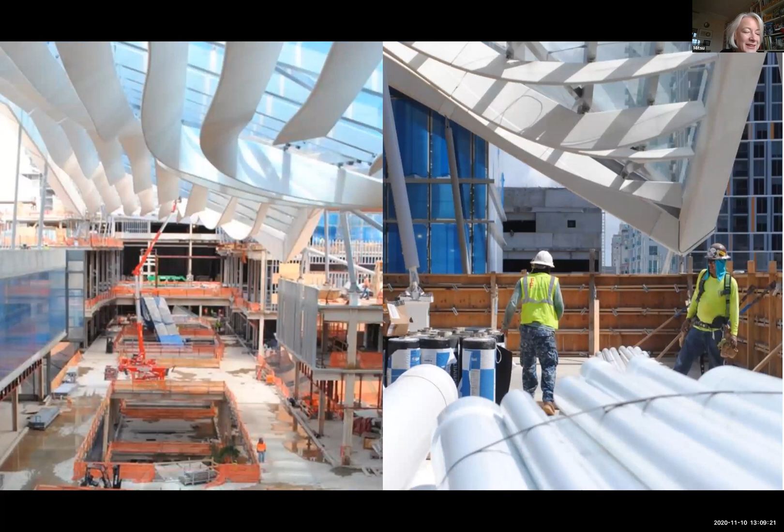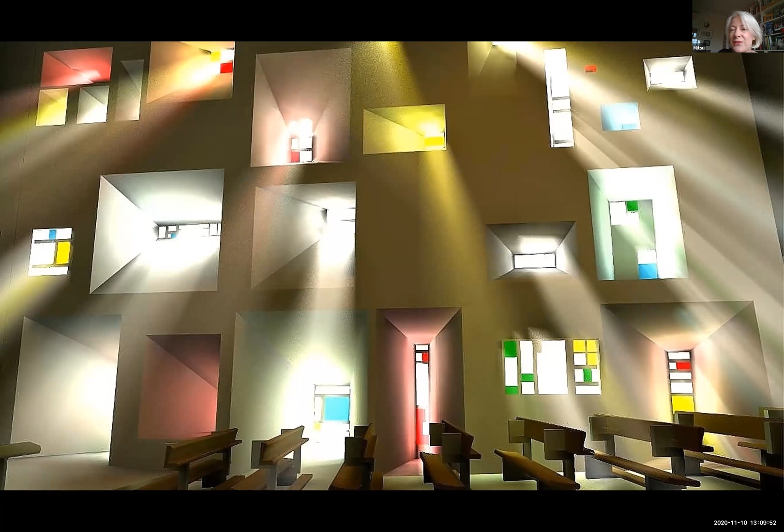Also, architects have the comfort of regular payment during design development according to pre-agreed fee scales. This is Ronchamp, but Corbusier was nevertheless paid all the way along. But artists very often have to fund their own exploration and research themselves, in the hope that they'll find a gallery or a collector prepared to purchase what they've created at some later stage. This project here is Frank Stella's bandshell, a very large sculpture for Miami, which he self-funded to sell later. Frank Stella has the wherewithal, but this was over $1 million of self-funding. Artists have to really believe in their own work, self-promote, and be their own entrepreneur in lots of ways, in a way that an architect is often spared from.

So there's a very strong emotion in artworks and a single-minded focus. So I'd like to talk about my first encounter with a real artist - it was Mark di Suvero.

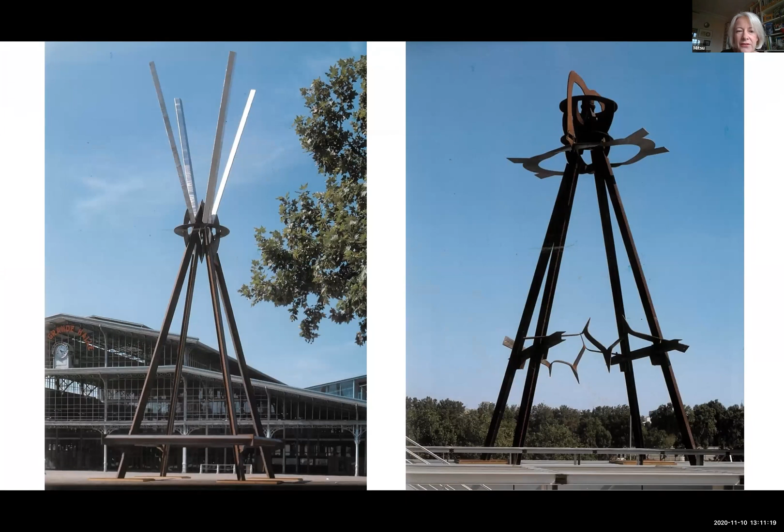That was in 1997, quite a long time ago, when the city of Paris invited him to exhibit 9 large-scale works throughout the city. This was at the Esplanade des Invalides, and there were 4 sculptures that had already been built, so there wasn't any health and safety issue for the public. But 2 of the projects, these 2 here, were called E = MC² on the left and Grâce à Toi on the right. These he was building specially for the exhibition.

The one on the left was 30 meters high, already built. The one on the right was only 12 meters high, but as you can see, quite fragile sculptures, although the basic stability was not in doubt - 4 legs, not balancing precariously. Nevertheless, quite lightweight elements. The foundations needed to be checked, because the one on the right was sitting on a wooden parvis.

At the Bibliothèque Nationale. The one on the left is in front of the public parvis in front of La Villette. And the city of Paris at the last minute got cold feet and said, you know, we need some calculation notes to ensure that these new works are safe, because they haven't been proved before.

So I went through all the process. This landed, just by chance, on my desk, and I went through all the due diligence of checking all the assemblies, checking the welding, etc. And I came to the conclusion that everything was fine except for the temporary foundation plaques at the bottom. That was all sized correctly, but Marc hadn't welded quite far enough up on the upper elements of E = MC².

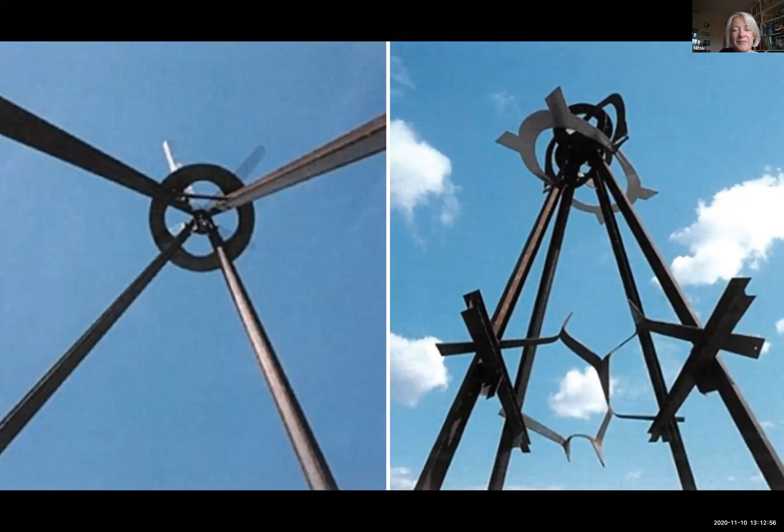At that time, I just assumed that an atelier had done all the welding. So I said, well, the weld lengths need to be extended. This is another view from down below. The E = MC² is like 30 meters high, so it's a 9-story high building.

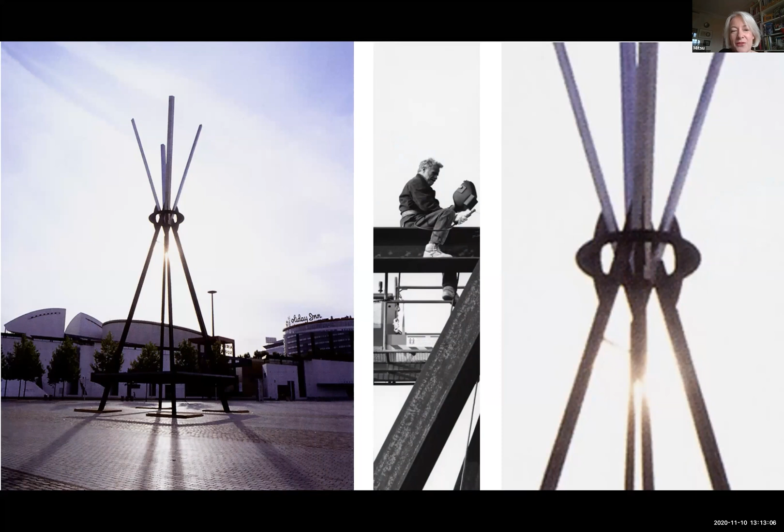They don't like to delegate. They like to be in direct contact with the material themselves and take charge of everything to do with the creation of the form, as far as is reasonably possible.

So that was 25 years ago. The sculpture has now been moved to Storm King Sculpture Park in upstate New York, and Marc's welding is still holding good. So it was a really important lesson for me, in that although sculptures are often designed as temporary installations on a given site, they can then be transferred subsequently to many different sites. And when you're doing the calculations to justify them, you have to bear in mind that the wind loads for this one site may easily be exceeded in another site. The foundation conditions may not be the same, and you have to build in flexibility into your engineering design approach for these elements. So that was my very first foray into the world of artists.

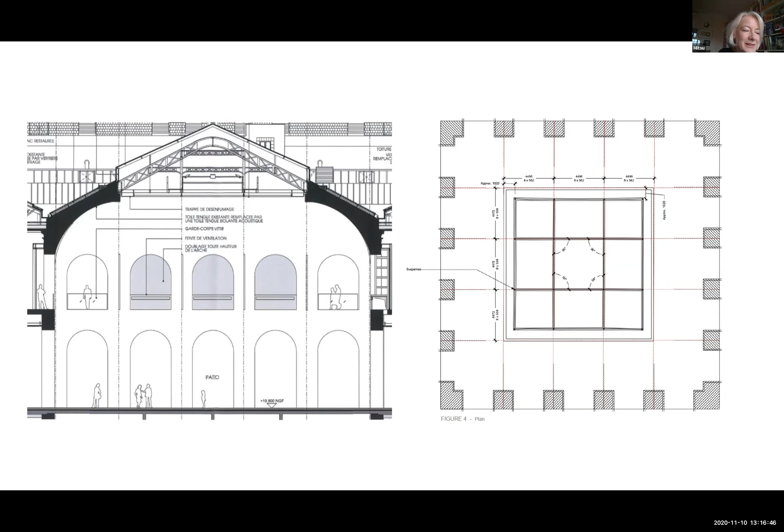So the tricky thing was it was a 19th century structure. The rails that we needed to hang the threads from were arranged at 4.5 meter centers, parallel to the arcade down at the bottom.

But of course, if you see on the right hand side — sorry, can you see my... how do I get rid of that? Don't know how to get rid of them. Masking it live to video. That's better.

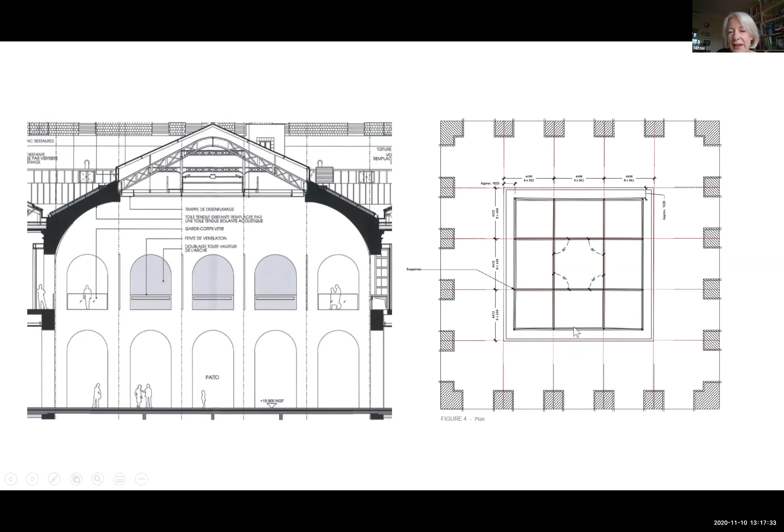So you can see that the actual grid work of the structure from which we could hang the 19th century rails was not aligned with the arcades. So we had to have some quite long cantilevers, like 6.5 meter cantilevers, which you can see on the right hand side here. We sized all that and thought everything was fine.

And then the checking authority came back and said unfortunately there had been a mistake in the allowances made in the 19th century structure that was checked by Bouygues at the time. They were supposed to allow for a weight hanging of 1.5 kilonewtons at regular intervals through this roof, but they only allowed for a 1.5 kilonewton weight at one position in the roof.

So we were like, oh, that's a bit tricky, we've got to redistribute that. We had to go into a huddle with the Bureau de Contrôle, the checking authority, and spent two days over a weekend on it. We didn't speak to anybody else, and we didn't let the artist know that this major problem had just occurred in justifying the structure. We managed to justify the 19th century structure for the increased loads we were applying on the framework, and everything continued apace.

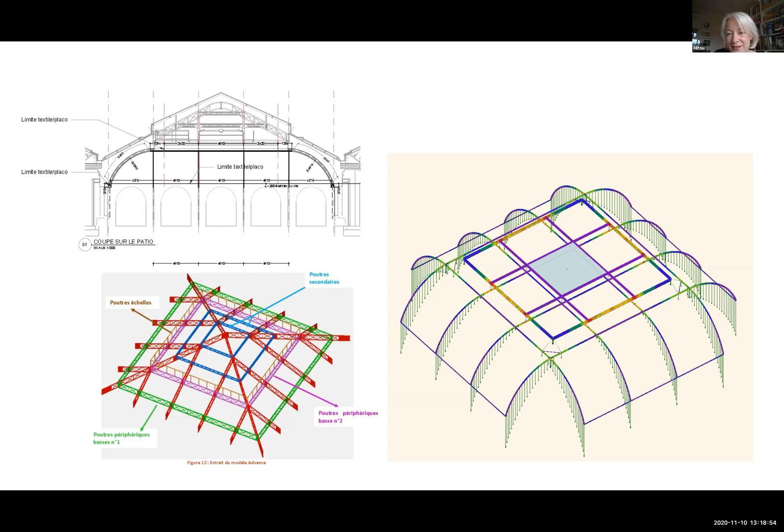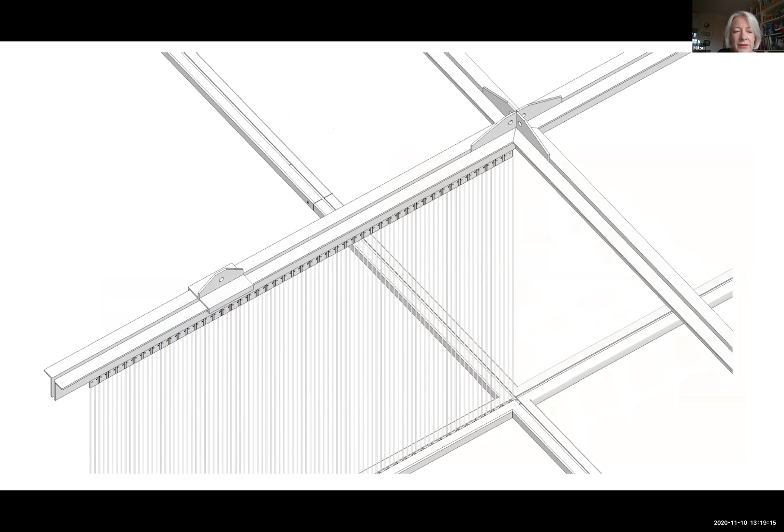Of course, at the time this bombshell struck, the rails were already built and the threads were being threaded by Susanna. This was the method she used to connect the threads — every 8 millimeters a silicone thread is threaded into a cone-like structure at the top, and we designed a paired T-section to clamp the threads in. So very simple structurally, but it had to be as discreet as possible.

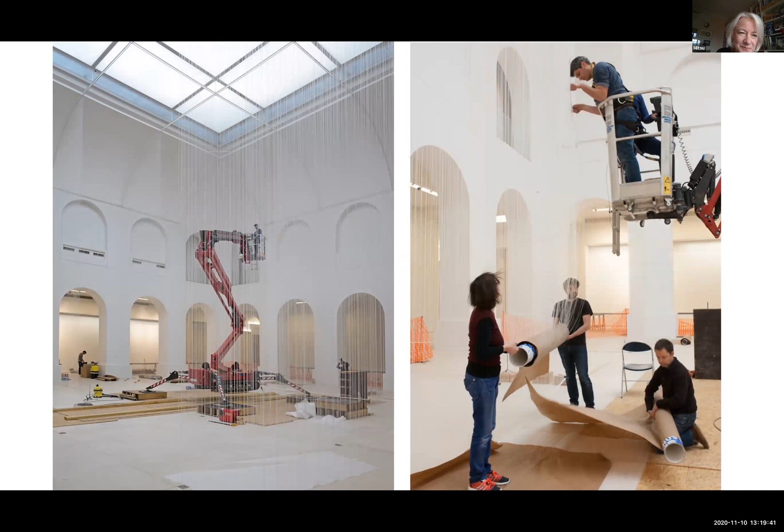Another interesting thing we had to do for her was — you see the rails are curved here — she wanted the rails to be at a constant distance from the curved walls. We couldn't connect to the walls, I forgot to say, because those curved zones of the walls are actually made out of fabric, like Batyline fabric, so they had no structural strength whatsoever. That's why we had to cantilever for about 6 meters from the hanging points, which you can see just about here.

Obviously when the rails deform, the extremity bends away from the wall, so we had to work out what the pre-camber would need to be, so that when the rails moved into place under their own self weight plus the weight of the threads — mostly their own self weight — we were able to achieve, in the finished condition, a constant gap between the rail and the fabric curved wall behind.

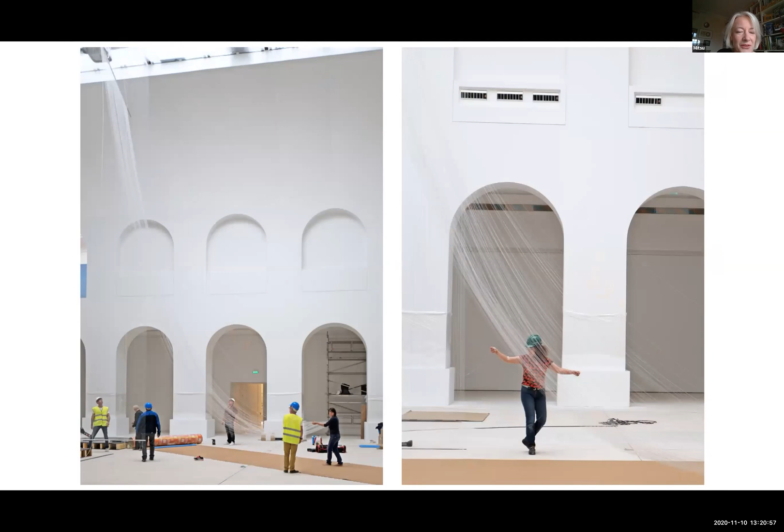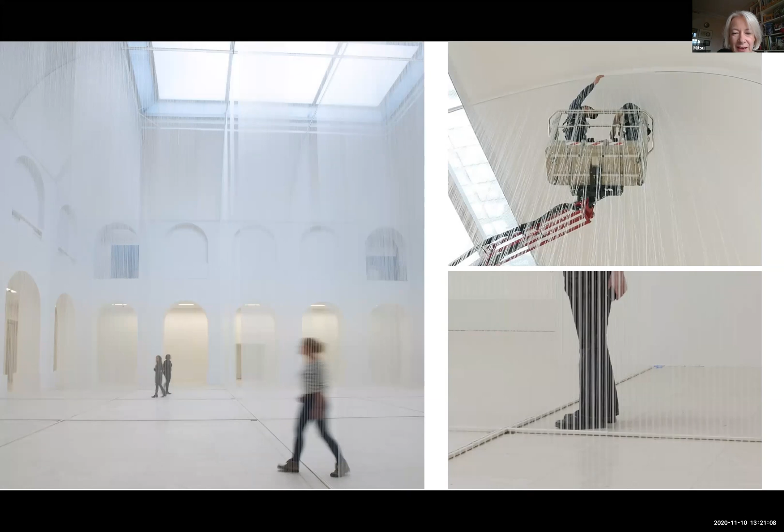And this was the effect you had when walking through the piece. It was really rather magical, and there were some sound effects also in the arcades surrounding the area, which were able to intensify the mysterious experience of walking through these threads.

So the piece was then bought by the Pompidou Center and became part of their permanent collection. And then the Louvre Abu Dhabi, once it had become part of the national collection, wanted to show it in Abu Dhabi.

Last year, we were asked to look at how to hang it in a completely different gallery experience. This is where I discovered about artist protocols, because Susanna didn't just ship the piece overseas, she completely redefined it for the new volume and the new context.

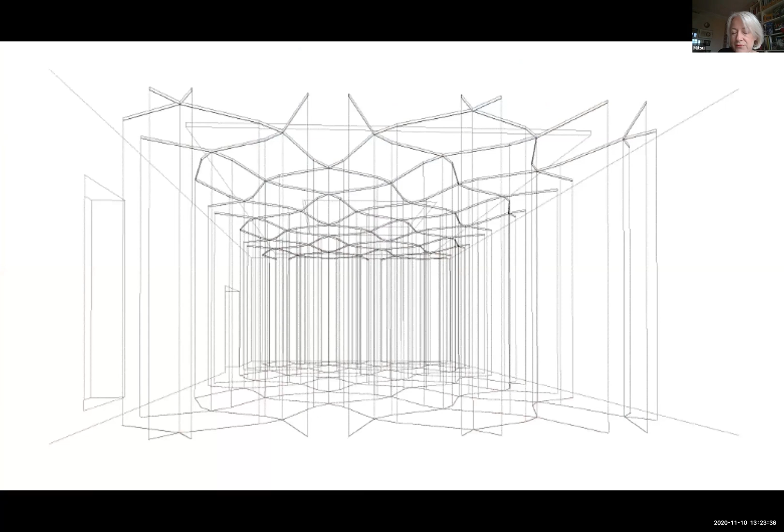Susanna wanted to use the natural light filtering through the mashrabiya—that was the inspiration. If I go back a stage to the reconfiguration of the rails in the top and bottom: we weren't allowed, for warranty reasons, to hang anything off the central zone because they had some problems with the functioning of the blinds, and if we hung anything from them, the people attacking them for non-functioning blinds could say it's our fault because we hung something on it.

So we had to span up to 9 meters across this empty space in the middle with the rails, and still have rails that were as small as possible. The second challenge we had was how to suspend the rails from what was inside the glass ceiling.

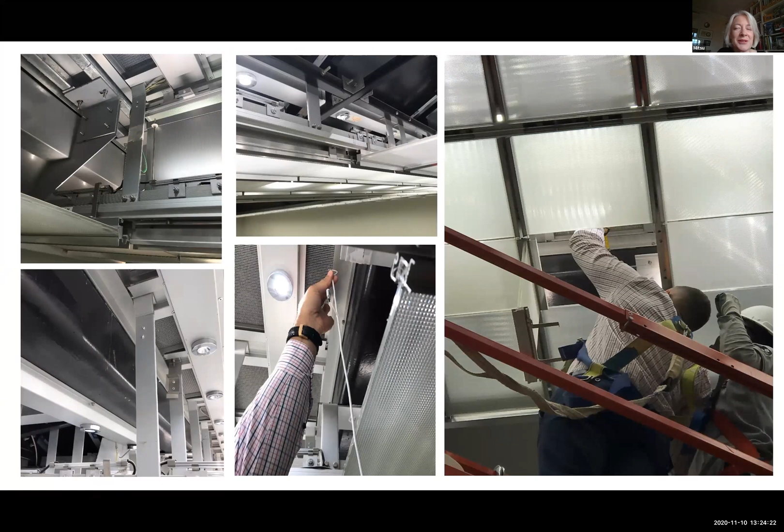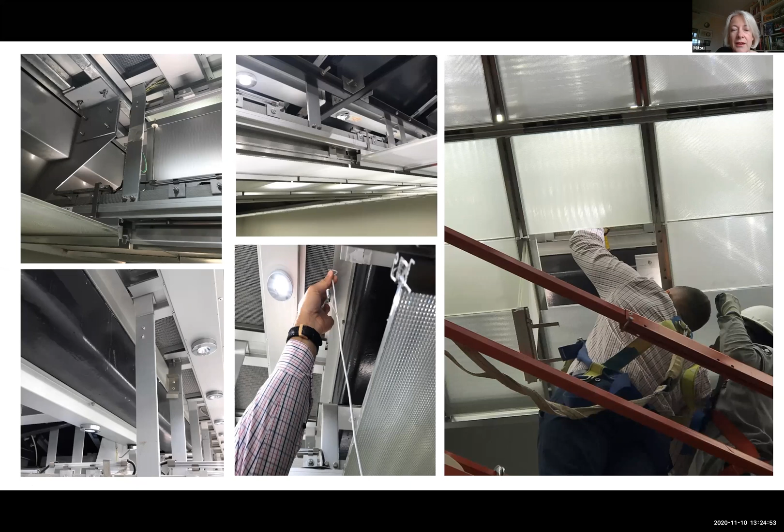So finding suspension points were quite tricky, and then we had to build in 3-dimensional tolerance in each direction, because while the rail positions had to be perfect, where they would interact with the crossing points for the glass couldn't be completely predicted in advance, and what we would find inside to hang to couldn't be completely predicted in advance.

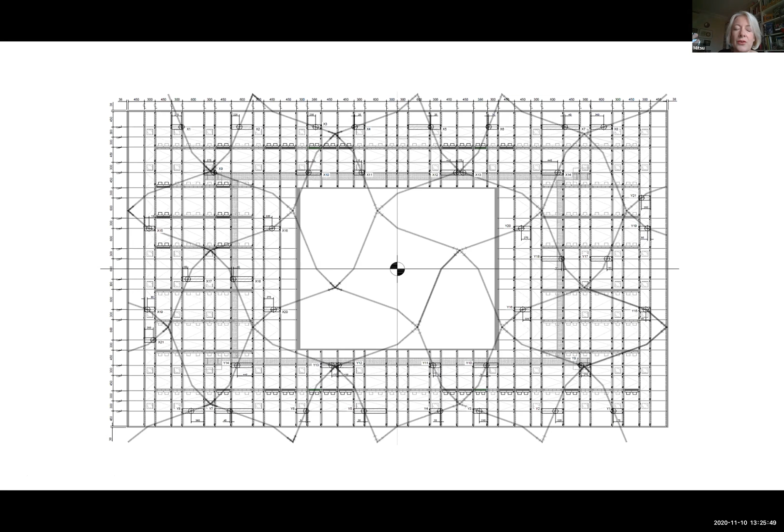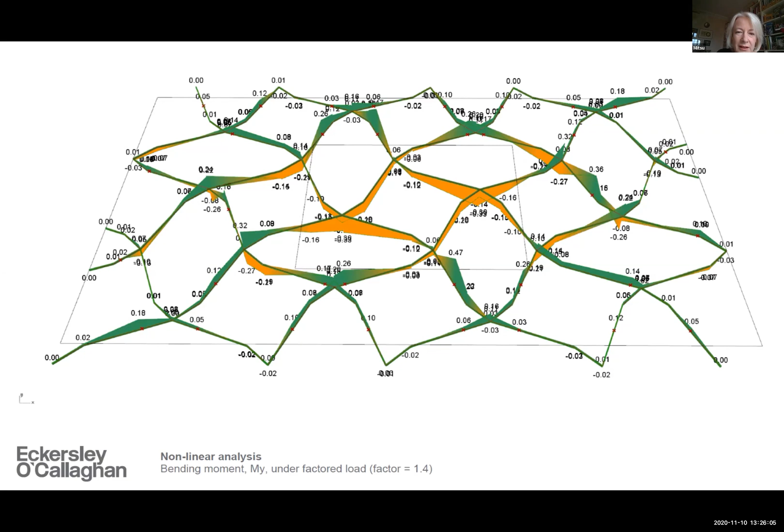So after having analyzed and determined the size of the rail that would hang the threads from, this was the analysis here. We had to work out how the elements could be prefabricated. This is a suspension system we came up with. So even though we were spanning up to 9 meters, we were able to get the structural element down to a 50 millimeters by 30 millimeters rectangular section.

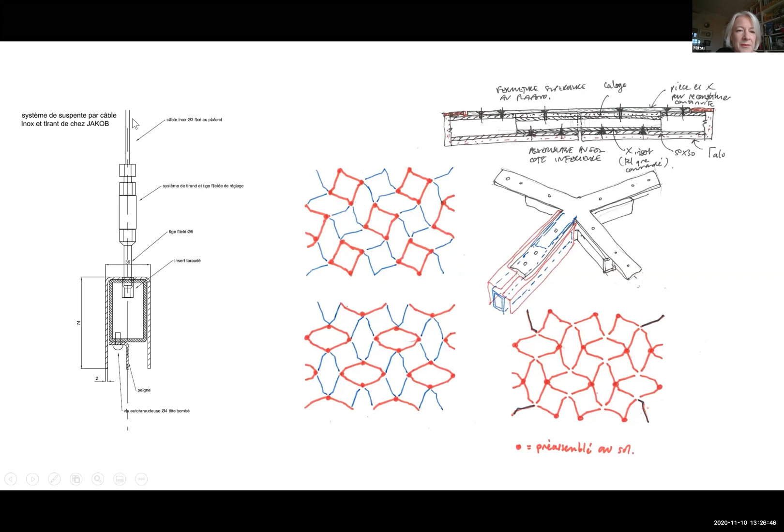The comb system that you saw in the previous model, that Susanna used to connect the threads, was connected on the underside, and then we had a cache around to hide the technical bits, if you like. And then the 3 millimeter cables hung the rails back through the ceiling into the roof.

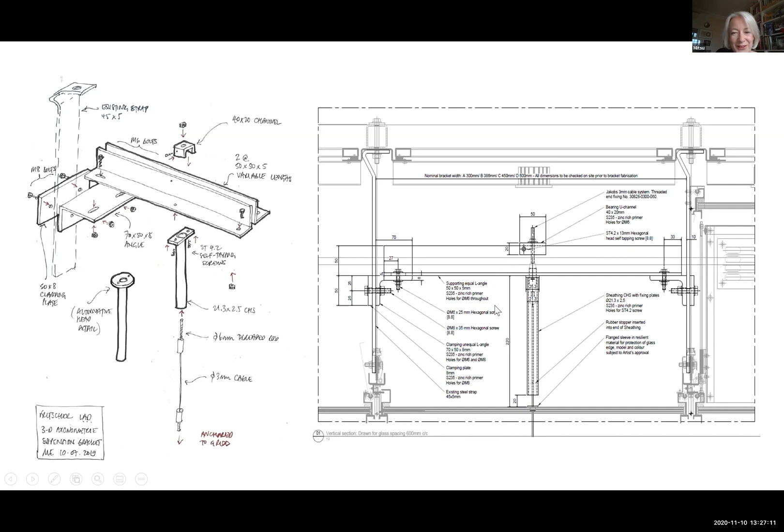These were the adjustable bracket connections that we came up with, and this was everything that was hidden that we had to develop as a clamp system within the roof. So this is the cable coming through, and this is everything that you guys didn't see. That's why I called this talk a disappearing act, because it's all about letting all that stuff, all our work, become invisible.

And here are some views of the finished work. It feels quite different from the Nantes piece because of the proportions and because of the zigzagging of the rails. But I think you'll agree it's very hard to find the structure beyond that.

Here's a suspension point, for example, and here's another suspension point. But we got them as discrete as possible, and Susanna was happy, and there was some rather lovely effects of the light coming through the moucharabieh into the space. There we go, that's my favorite photo.

The next project I'd like to talk about was a really seminal one for me. It was again a while back now. It was in 1998. Martin Francis contacted us when I was at RFR to say that he'd been asked by Frank Stella for some help in transforming an idea he had into a huge band shell, which would stand in front of a sports arena in Miami.

So the concept came from this form that he used to make a lot of different shapes. That's Frank Stella there on the left hand side. A Brazilian beach hat, which you can cut from a piece of paper. So it starts out as a developable surface, and then you twist it into crazy shapes, and it becomes a sculpture. He wanted this to become 15 meters high and become, well, he called it a band shell, a sort of a space where people could congregate or have events.

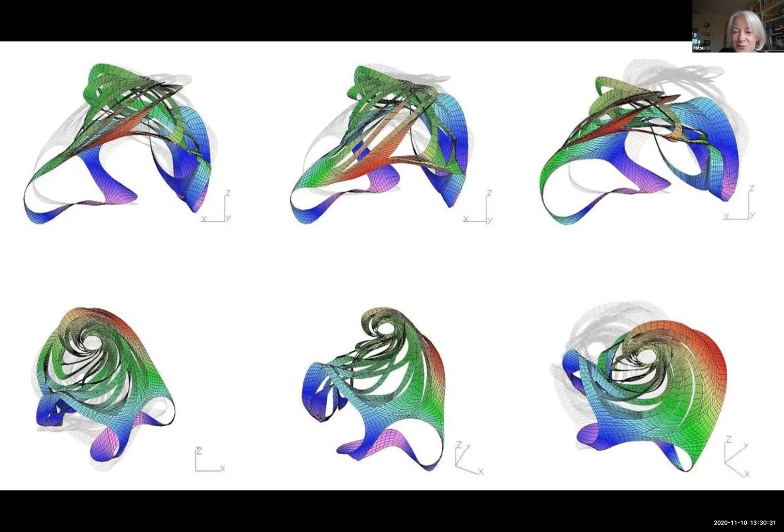And then that was exported to our engineering finite element software. And these were the results of the analysis, pushing wind at it in various directions on the sculpture. And as you can see, the conclusion was it deformed far too much.

So we made a suggestion to reinforce the basic form with some trusses, and I naively thought at the time that Frank Stella might be happy to hang the sculpture from a sort of external frame of trusses. Of course, he wasn't prepared to do that at all. He thought the trusses was a fantastic idea, but he thought they'd be interesting if they wove in and became part of the sculpture.

So you can see, if you can see my mouse here, these are the trusses. So it came back looking like this, and I gulped, went a little bit pale, and thought, okay, so these are as inefficient as truss forms as one could hope to be. They're full of, you know, picking up bending moments, but it's very beautiful. So again, you see them here.

So at this point, we left behind everything that was physical modeling, and the form of the sculpture continued to evolve directly in the virtual environment. And this was a real first at the time. We produced no drawings. There were no contractual drawings between us.

We then worked with a shipyard called CMN in Normandy, who were able to build the work for us, and we just transferred files from one team to the other. Stella's team did the cloud of points and interpreted the first form. Martin tidied up the form and added the trusses, manipulated the trusses for Stella, and extruded all the tubular elements around the edge. He sent it to us, we analyzed it in our finite element models, went back, changed the wall thicknesses, and defined the requirements for internal stiffeners.

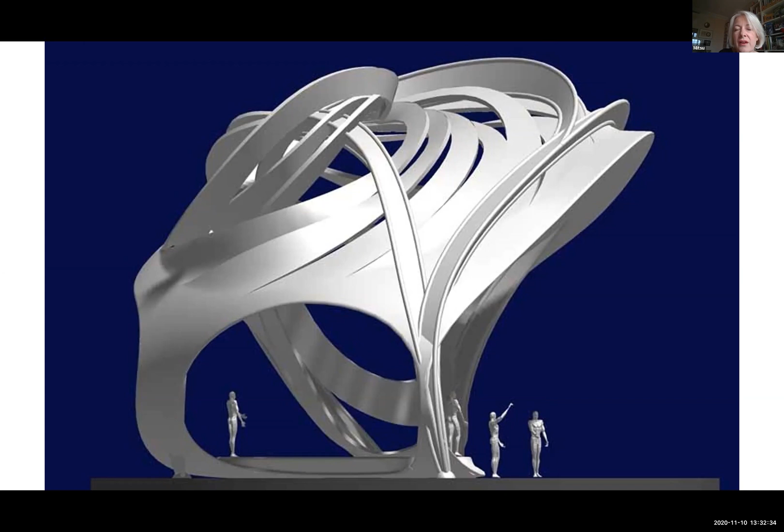And then it got sent to the naval shipyard—our files and Martin's files together got sent to them—where they imported everything into their version of CATIA, and they could work out cutting patterns for each of the pieces and schedule the fabrication process.

So these were our finite element models. And in the meantime, Stella also built a 3D, third-size model in fiberglass, which taught us a few things. We changed a few of the details and the proportions as a function of that. That's in his atelier in America.

This was also happening digitally with modem software and internet connections, very slow connections, but we were again very rarely actually physically meeting up, rather working across continents on this process.

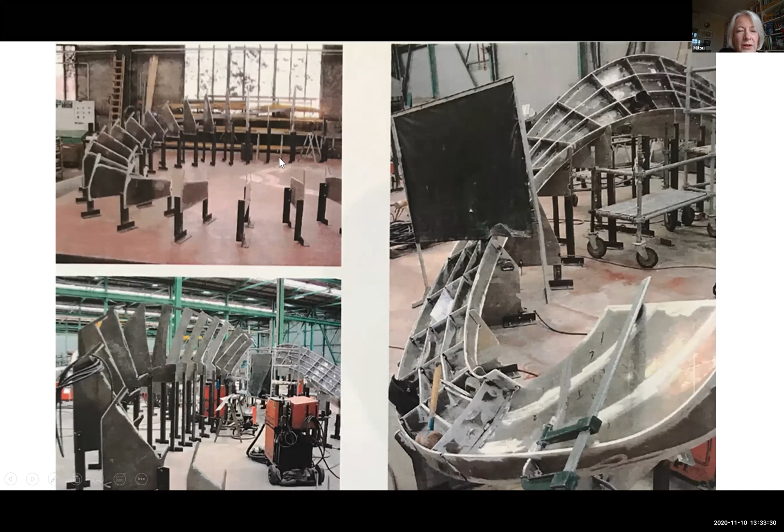These are photos of the different petals, the twisted elements, we called them petals. First you had to build a jig on which the panels could be laid. Some of the jigs were really very complicated, as you see bottom left. Each jig had to be built to a millimetric tolerance.

We said to the CMN, you don't actually need to build millimetrically. If the petals are a little bit 100, 200 mil out of their theoretical position, it doesn't matter, it's fine for the artwork. And they said, no, we can't deal with that, it has to be millimetric precision, otherwise we don't know how to build it. So they proceeded to make the piece in this very rigorous way.

We had, because of the very strong wind loads and because we were having to use a rather weak aluminium in order for it to be flexible enough, and we were welding it a lot, we were working at aluminium at half the strength you can get for typical extruded sections. We had to have quite a lot of stiffeners inside the space. The transverse stiffeners were there to make the form, and the longitudinal stiffeners were there for the wind loading reasons, to increase the strength of the overall piece.

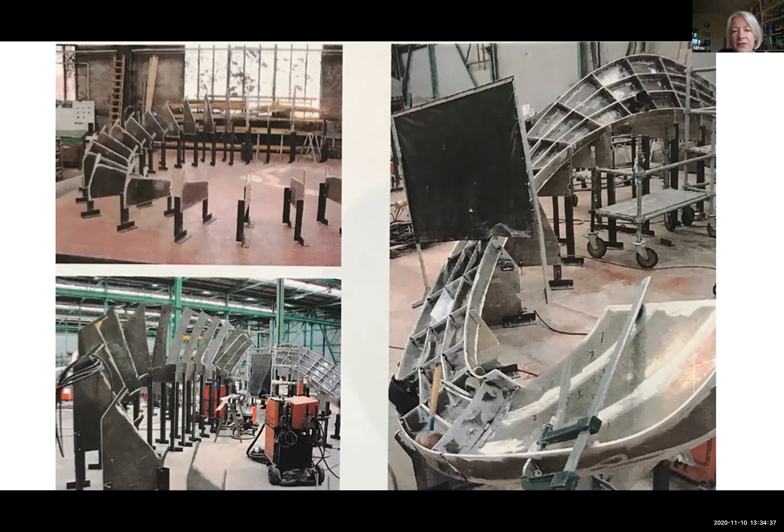These were the trusses. There were up to 80 people at a given time building the trusses. Again, those triangular elements you see were just jigs, internal jigs rather than external jigs for being able to build the tubular forms. And the piece gradually went together.

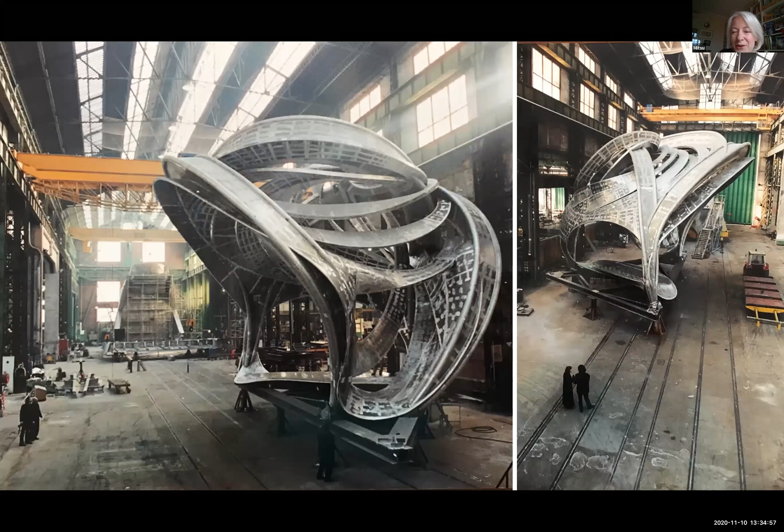And we finally got to visit. That's me, bottom left. It was a very strange experience being so used to seeing this shape at the size of a computer screen, and all of a sudden being able to walk inside it.

This is Frank Stella on the left with the mayor of Cherbourg, who came to visit the sculpture before it got shipped. What was really a revelation to me was the physical energy you felt standing inside the piece. I realized this was something Stella had always known would happen, this emotional response you get to the sculpture, but it's something we couldn't see coming until we were actually there looking at it. We were so preoccupied with the technical aspects of getting it built, dealing with some very complex intersections, which had to withstand hurricane wind loads.

And it was such a delight to actually step inside the space and realize the power of the artwork that we'd been helping to create. So there are some other photos of this.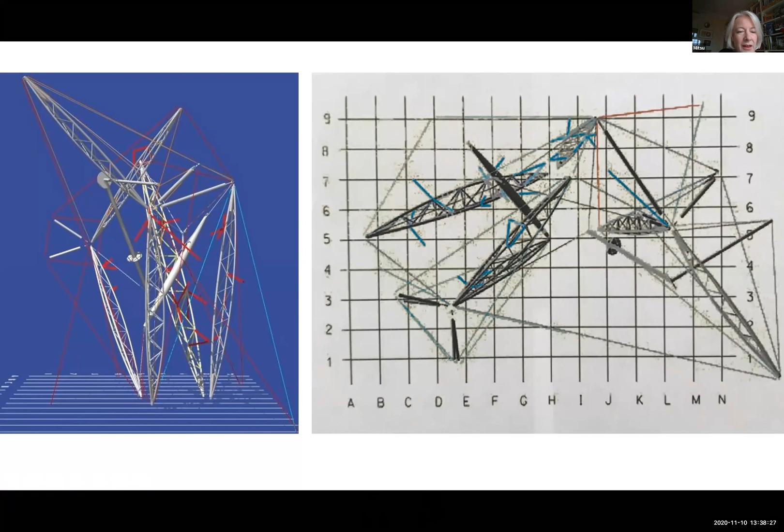One of the amusing things we had to do was make the members of each of these cigar trusses a different diameter, just to give more interest to the sculpture, for no structural reason whatsoever. So again, we had to integrate that into the concept.

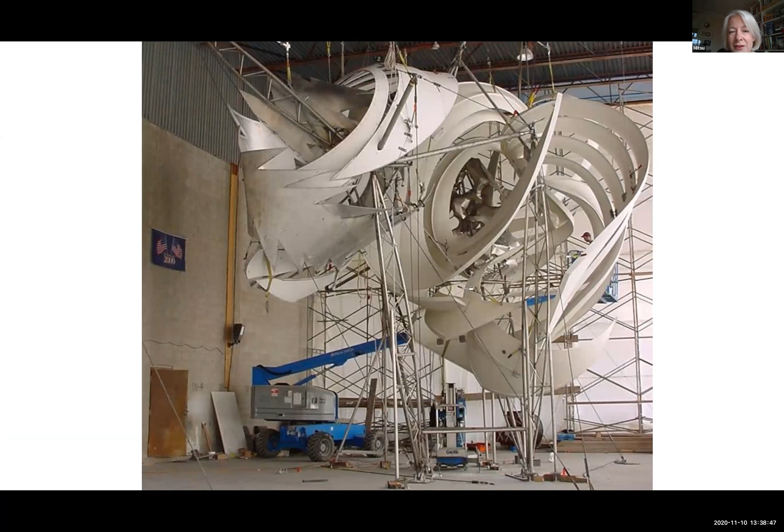We worked out a theoretical loading configuration that we then played with by throwing a few bandshells onto our model of the structure, because of course we couldn't model the stuff he was going to throw at it, since he didn't know yet. Then it went to Rhode Island and started being built, and fiberglass and stainless steel elements got added on.

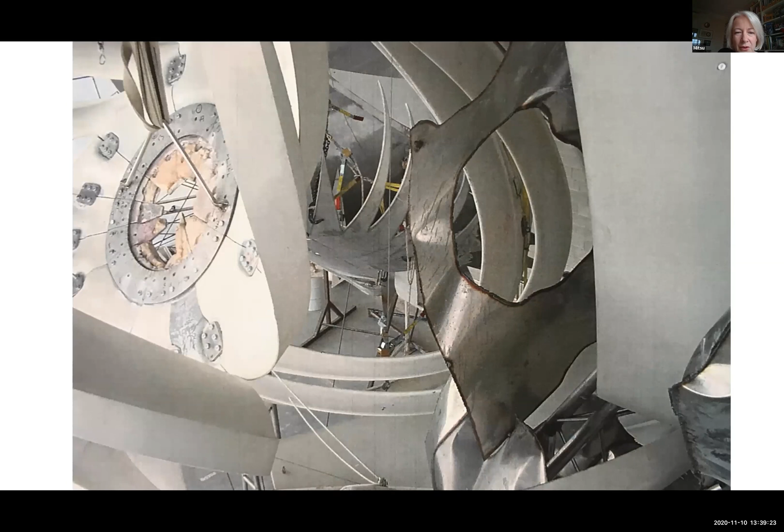You can see in the middle here, this piece was where he had a bit of fun. He took two very thin sheets of stainless steel, inserted a valve onto one side, welded them together in random circular elements to make sort of a Dalmatian formation, cut holes around the welding lines, and then just blew it up like a balloon to get some of these strange forms. So there you can see the stainless steel blown up.

This is before the carbon fiber went on, but then elements of carbon fiber were added - you can see here.

And here it stands to this day in front of the National Gallery of Art in Washington, cocking a snook at the Capitol building.

It must have had quite a - Stella must have been quite pleased with it being there these last four years, because he wanted it to be a celebration of the chaos and unpredictability which characterizes the human condition. And it was certainly that as an experience, as an engineering experience, designing it to be safe for the public.

On a completely different scale, the work we did with Thierry Videt and his son Jean-Sébastien turned out to be very useful in my day job as a facade engineer and structural engineer, because Thierry works exclusively with 50% perforated stainless steel. Here he wanted to develop a previous idea he'd built without engineering help - he liked the scale of the model, but when translated to one-to-one, the perforated stainless steel got very floppy.

So he asked me to identify the minimum number of connections he could put in, and the amount of curvature needed in these conical sections. These pieces, in order to create this sort of diaphanous effect of is it there, isn't it there, that he was very experienced in creating - at a scale where these pieces were 9 meters long again.

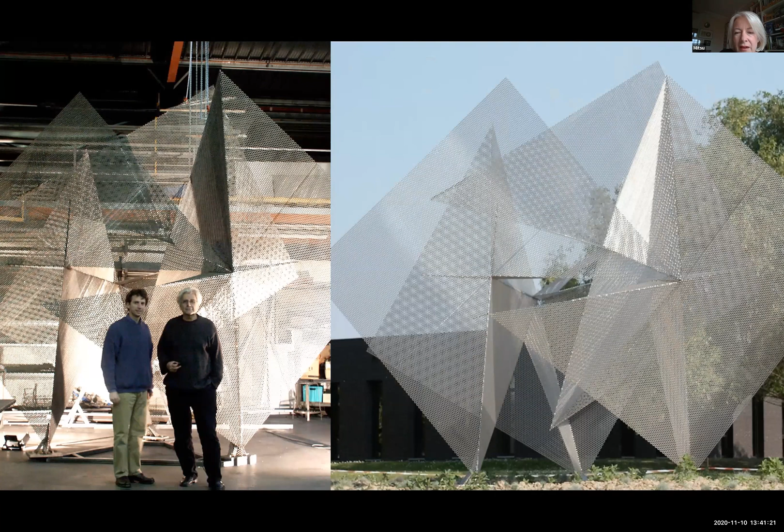We worked on a number of sculptures with him. One was a piece in Brussels, 8 meters high, using a lot thicker material. So we had to do quite a lot of work on how to punch through 8 mil thick stainless steel without distorting it, whereas punching through 2 mil stainless steel is a lot easier.

We also had to integrate stiffness at the bases and along the fold lines without destroying the basic concept of the sculpture. So you can see there's no apparent reinforcement, but we did have to build in some slightly reinforced fold lines, which had to be perforated in exact synchronicity to make sure the visual balance and the light flow through the sculpture wasn't adversely affected.

This was even more important on this sculpture, a 12-meter high column in Bois-Colombes in the Paris region, for a new housing development. The promoter wanted to bring artwork into the space, and it was very simple folded forms that were connected together.

For which we initially proposed reinforcement along these folded edges. You could imagine, structurally speaking, you put that into the machine and it tells you it's going to collapse. So we had to analyze it quite carefully to make sure the folds were stiff enough to stay in place, and that the radius of curvature of the folds was good enough.

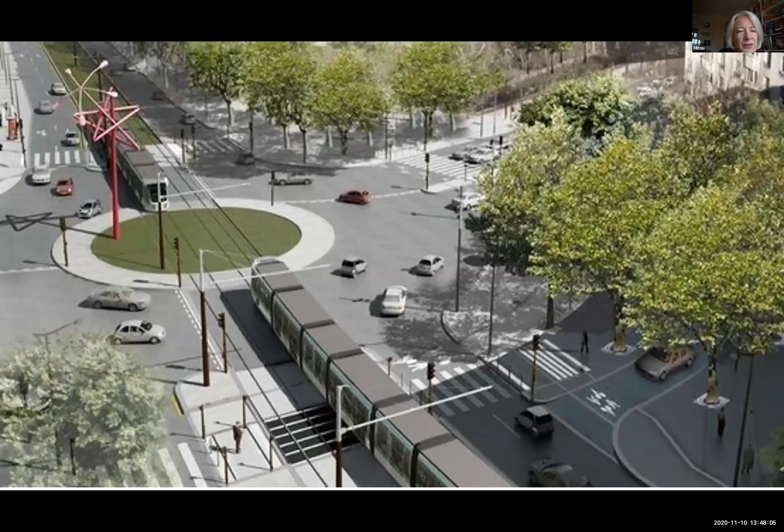For the T3 tramway we also worked with Mark Handforth, an American artist who did a lot of twisted lamp posts—here's one near Central Park in New York. But it was more of a challenge when we did one 17 meters high at the Porte de Bagnolet in Paris, the main entrance off the Périphérique. He wanted it to look like the lamppost had just been crushed and scrunched up into a knot, then exploded into these light elements.

So we had to make the connections here look as if they had failed structurally.

Although we had to make them strong enough so that they didn't fail. So what we did was made lengths of tube, crushed them and plasticized them and bent them round, then put reinforcements inside them that would continue to function correctly, welded up the edges, and put everything together in the atelier so that when they brought it to site—there's a close-up on these falsely failed nodes—this was put together on site and then lifted up in one piece.

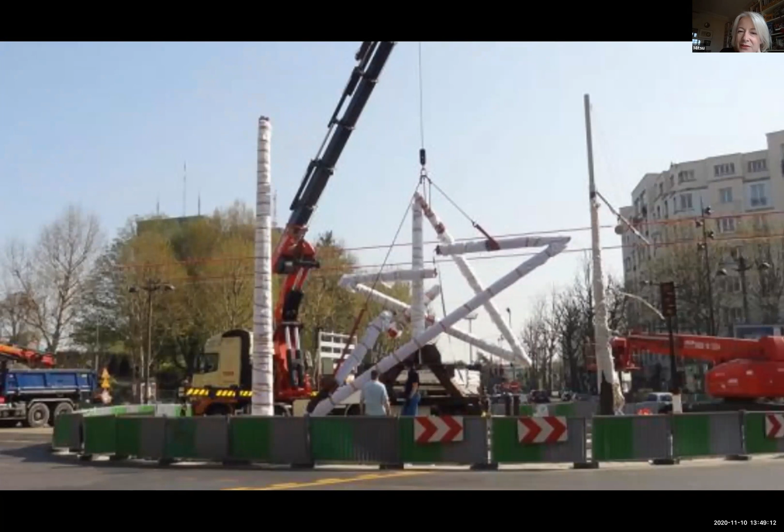Getting that through a checking authority is always quite a challenge, so we had to develop a testing protocol to show that everything's safe, and that although the steel's plastified, we've replaced an equivalent level of performance by welding up and adding some internal reinforcements. It was part reusing the metal, and part reinforcement.

The final project we did for the T3 was for Sophie Calle and the Pont du Garigliano. I'll whiz through these quickly since I'm running out of time. This was something she did with Frank Gehry—he scrunched up some pieces of paper and said this is a sculpture, this would be great in some vibrant colors, etc. This was a number of years after the band shells, so again we were able to scan the form on the left-hand side and make a hard model rather than just a scrunched up paper model.

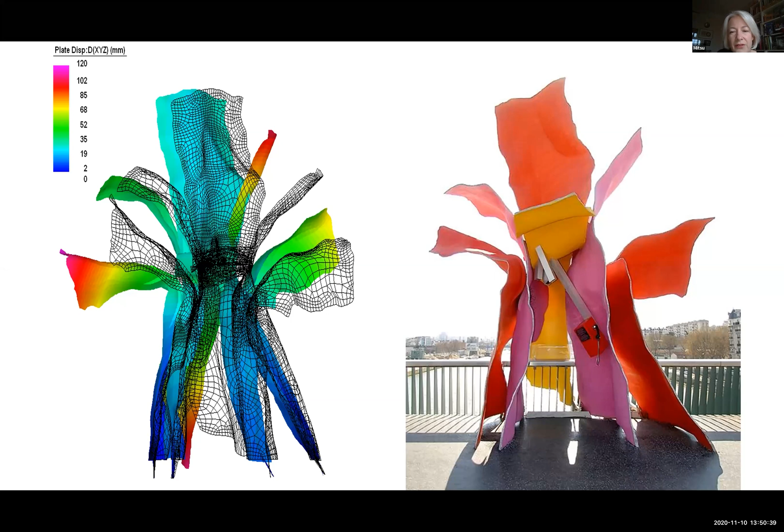That's on the left-hand side. We made that using a 3D printer. Then we had to work out how—this is the finished sculpture on the right-hand side—we could create these scrunched up paper forms in a metalworking factory. We decided the only way was to first negotiate on the forms themselves to make them a little more structurally sound, so we asked for them to be tipped up a bit more in the initial conditions, so that when they fell into place under their own self-weight, they'd still have an acceptable form for the artist.

Then we scanned those resulting forms, took them out of the computer, and identified them as individual petals again. They were hanging off the side of a bridge. This shows the interface with the foundations we had to develop for the bridge, and we had to work out how to build them.

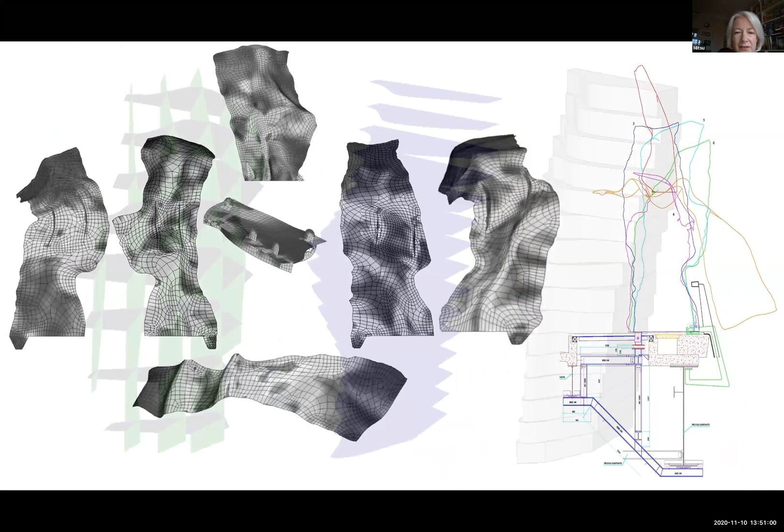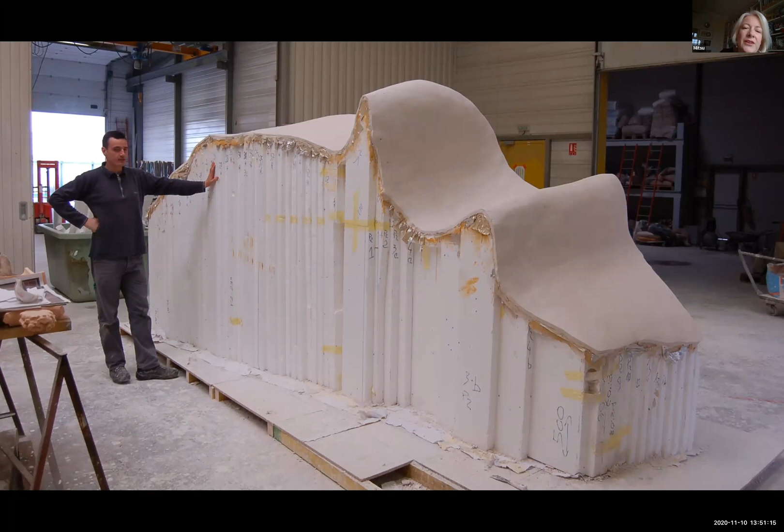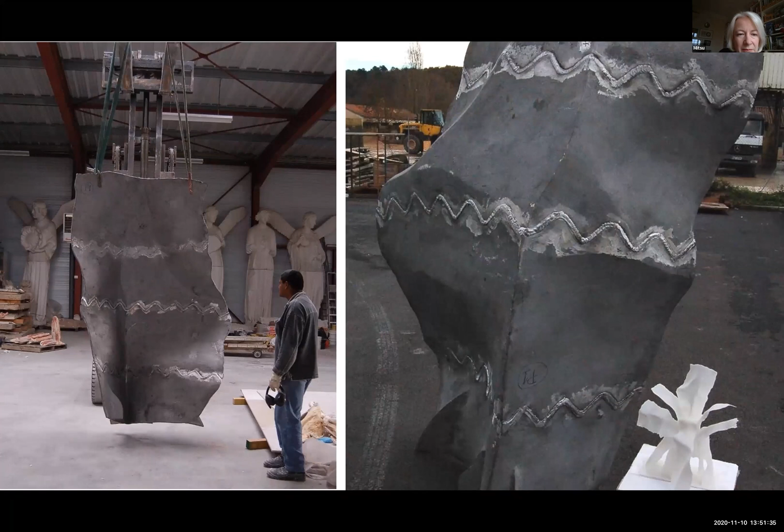We decided the only way to do this was by molding each piece, so we had to make some molds. We thought about different ways of making the molds and ended up making them from successive slices of polystyrene, which the guys in the atelier then smoothed over with plaster of Paris to create a form. That was used as a negative for forming small sheets of aluminium that were hot cast, in widths of about 1.5 meters, then welded together. We had to weld them in a zigzag form because you lose strength in aluminium when you weld it, unlike with steel.

If it was all in one line, you'd have one weak line across, which would be more likely to fail than the rest, so doing a zigzag line avoids that problem. This was the inauguration day—the idea was that Sophie Calle would make random phone calls from a phone box and see if anybody picked up. It's now been dismantled and is awaiting reinstallation in another spot because sadly it was subject to vandalism. These public art sculptures are always at risk of that—you have to bear that in mind when you're designing.

The final sculpture I wanted to talk about was with Anselm Kiefer, which we did very recently—a sculpture for the Rockefeller Center in New York. This sculpture was a temporary exhibition for four months. Each year, the Public Art Fund in New York commissions a sculptor or an artist to do something on this space, and on the right-hand side is Kiefer's initial sketch.

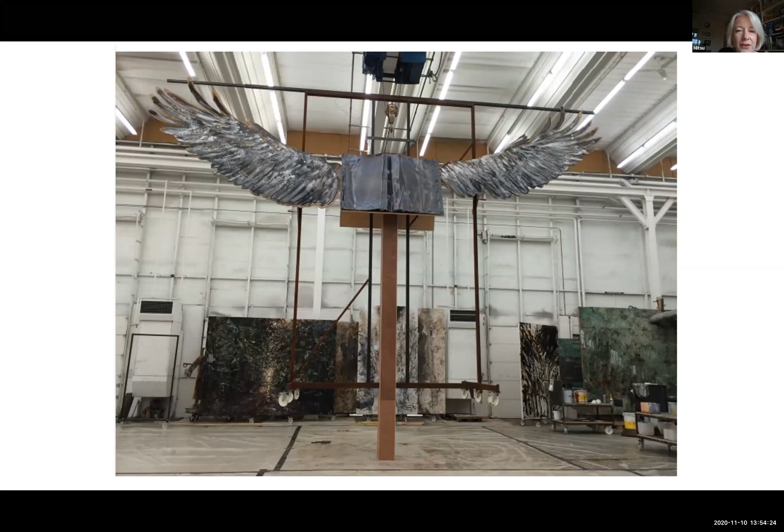So he has a small team who build stuff with him, but he's extremely hands-on. So he built this at full scale and said, this is what I want. We then built a half-scale model, as I say, all faced in lead. And he decided he wanted to, and we built—

We worked out a framework that could be hidden, that the guys in the atelier could then clad with the feathers. And then Anselm came along and decided to throw lead books at the base. It's one of his motifs, and throw in a few snakes.

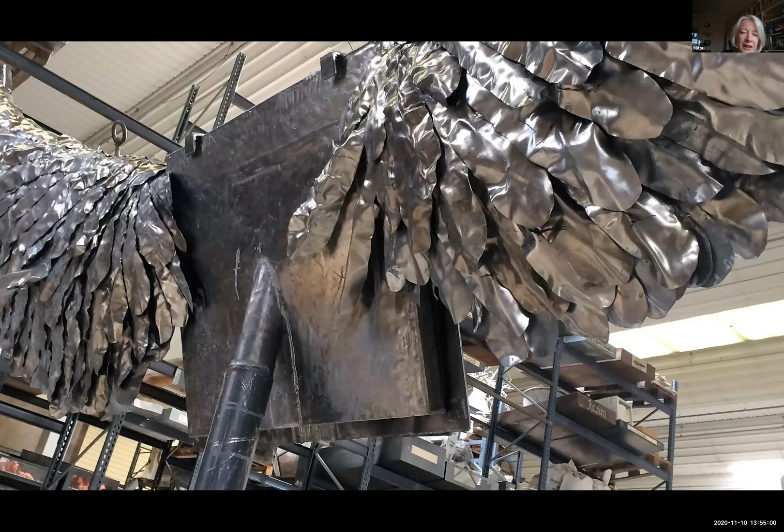One of the key details was we had to work out how to transport this, because the wingspan's 12 meters, across the ocean to Rockefeller Center. So we figured we had to make it in 2 parts, because it didn't fit in a container as it was. So the wings and the book were one part, and they had to slot into this connection, into the column and the base.

Communication was quite often a key challenge when I'm working on these sculptures, because artists aren't used to working with plans, and they certainly don't enjoy AutoCAD or Rhino, or they don't like looking at a computer screen at all—well, the ones I work with anyway. So sketches and working with their hands is the key thing.

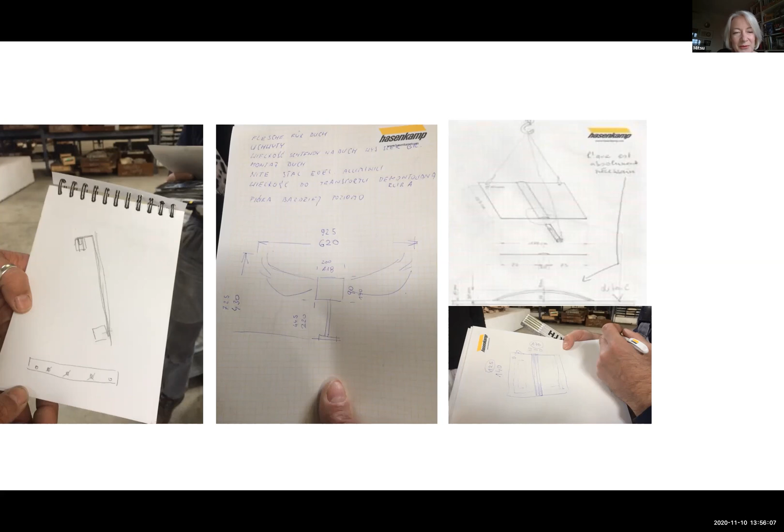So what they wanted to be built, this was basically the specification—the image in the middle—and this is basically all I had to work with. The guys who were building with him didn't speak a word of French or English, so that was also another challenge. So drawing becomes a very important medium for communication.

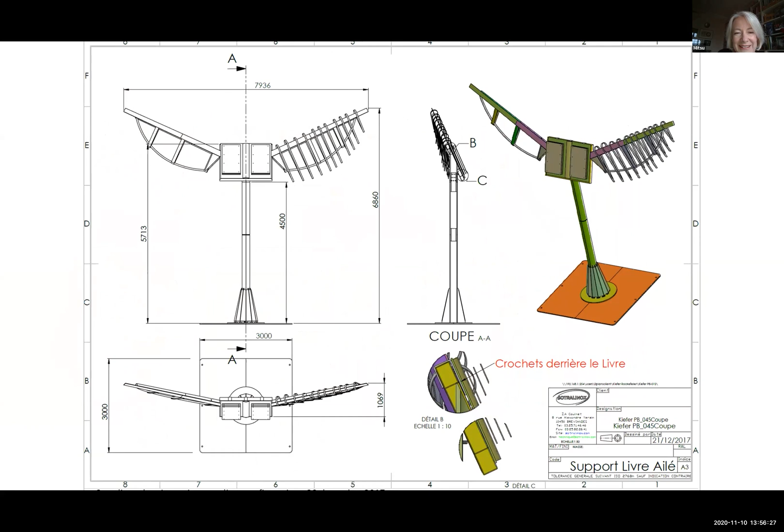So we did manage to get some more classic engineering drawings done for this work, and then worked with Sotralinox on getting the subframe built for Kiefer.

Then he went and tested—we printed it off at real size, and he tested it against his painted version and said, no, it needs to be a bit longer, this is more or less okay, this is too small, you've got to refine that, because I want it to be actually exactly like my painting.

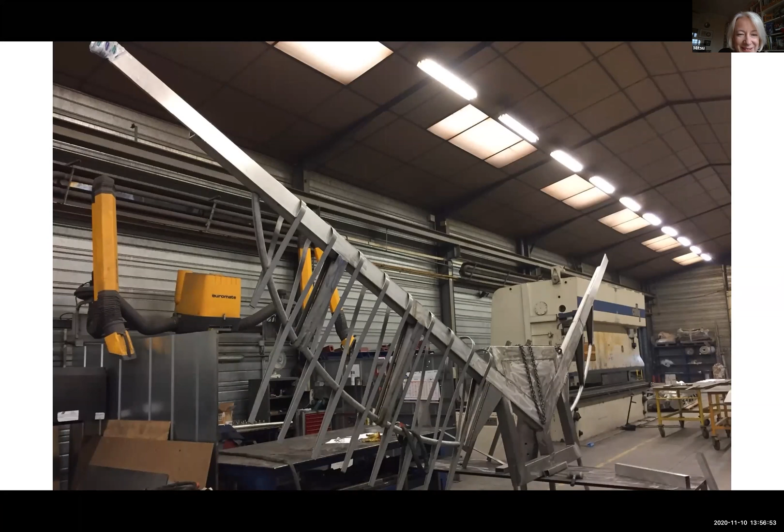And so then the piece was built, all in stainless steel, because although it was only for 4 months, they knew they would be selling it on to private collectors later on, and so they wanted it to be able to last potentially 100 years.

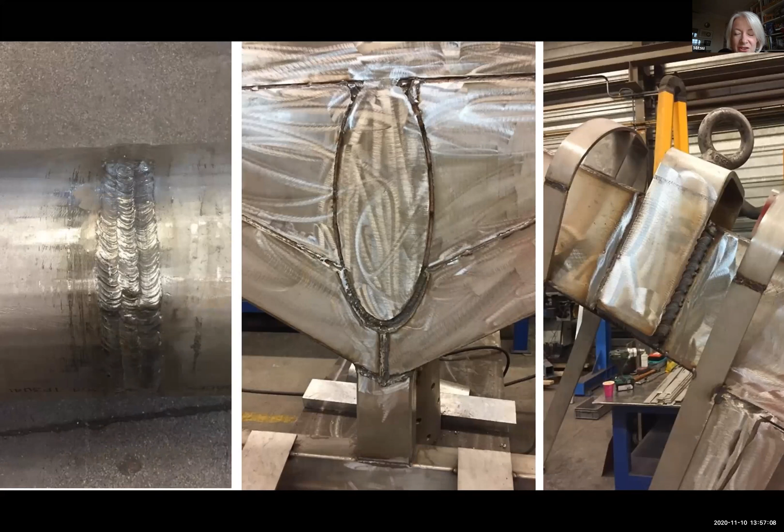So we had to do the weld checking, make sure that safety was going to be fine for not only the Rockefeller environment, but also a potential other wind environment later on. We had to build in lifting lugs, on the right hand side, to make sure the craneage—there would be 1 night to install this at the Rockefeller Center—so the lifting had to go extremely smoothly. Everything had to be thought of in advance, and we have to do that because there's nobody else.

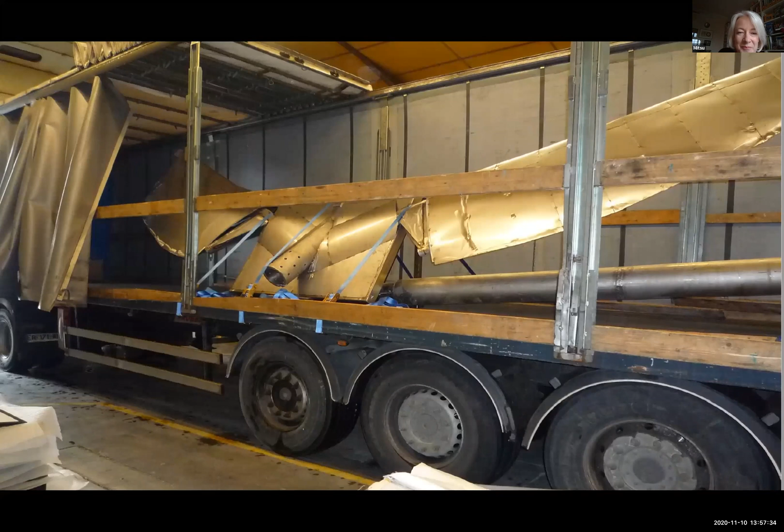So the subframe got clad so that the feathers could be put on it, and we prepped the connection detail to the supporting column. This was how the feathers got built.

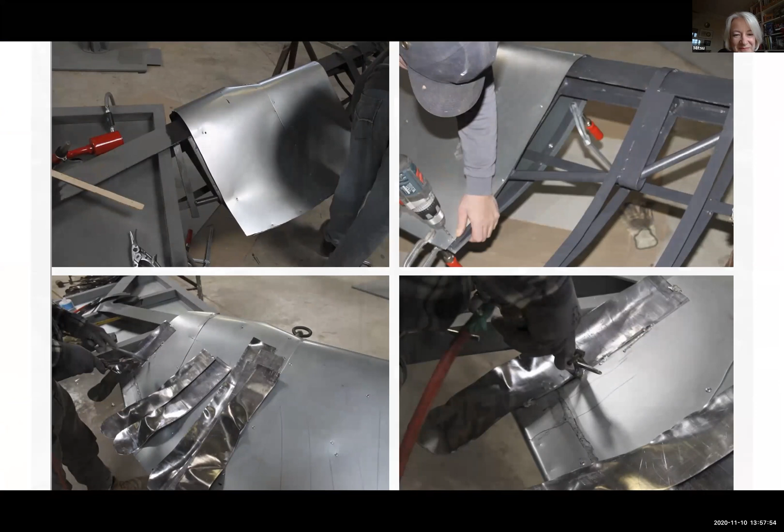Halfway built—this was the half scale model, but it was the same process for the full scale model, and it was checking all the time, Kiefer's team checking constantly against the spirit of the painted version, which was the inspiration. And then this is the mock-up built in his premises of what then got sent to America.

And we were checking very, very carefully how to align the sculpture, because it's facing Fifth Avenue. If the alignment of the sculpture was slightly off, then the wings wouldn't be parallel to Fifth Avenue, and that would be a complete disaster. So we had to build in very carefully some rotational adjustment for all the pieces.

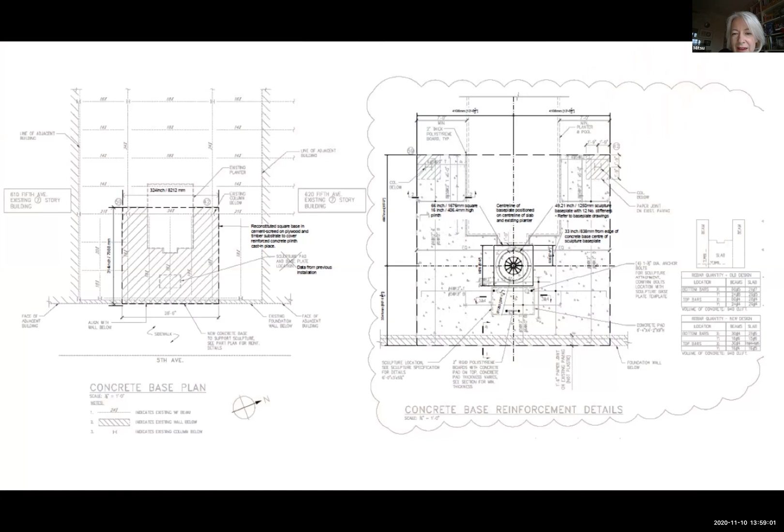We also, at Fifth Avenue in parallel, had to work with the guys in New York without going there, of course. So it's all at distance, on a temporary foundation, because we weren't allowed to drill into the pavers at Fifth Avenue, so we had to build a temporary block. So that was the work on that. We had to translate from metric into imperial—that was a bit of a challenge.

We also had to get involved with the fabrication and shipping schedule. Normally the contractor would be doing that, but there was nobody else, so we were doing it directly with Anselm's team, and he has a specialist shipper. We spoke with them and worked out everything that had to be there for the critical opening day, which was full moon on the 1st of May.

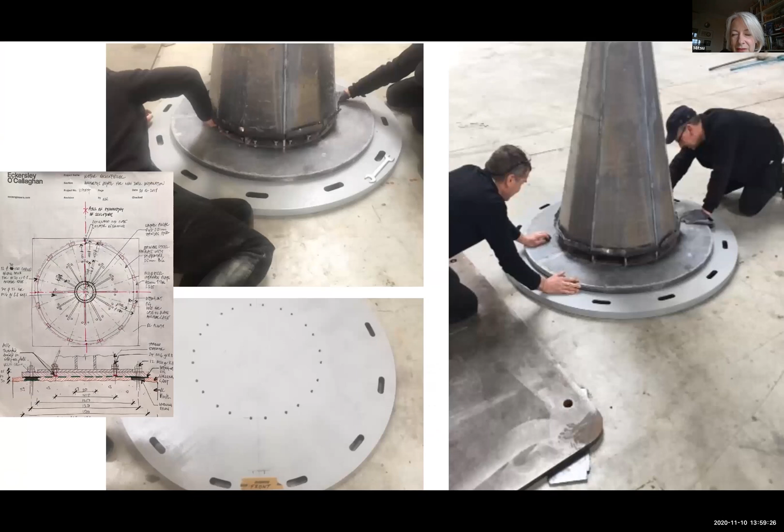This involved building in the rotational adjustment, checking everything in the atelier before it got shipped over, and making sure that you could physically get your hands into the space, as you can see top right here, to bolt up the pieces that we had actually thought about beforehand.

So then they clad it over with lead before shipping, and that was the final installation of the piece in Rockefeller. It was very exciting, and I was very, very proud to go over and see it built at the inauguration. Most of the plinth is actually hollow, but there is a concrete base, and it's now part of a private collection somewhere in Texas. There's the artist with the sculpture, and luckily he was satisfied.

Merritt, I don't know, there's one more sculpture on this story, but maybe we've run out of time. What do you say?

Well, it'd be great if we could ask some questions, maybe. Go ahead, because that's been fantastically interesting. And I was just going to say that it's beautiful what you don't see in these works, as you indicated at the beginning.